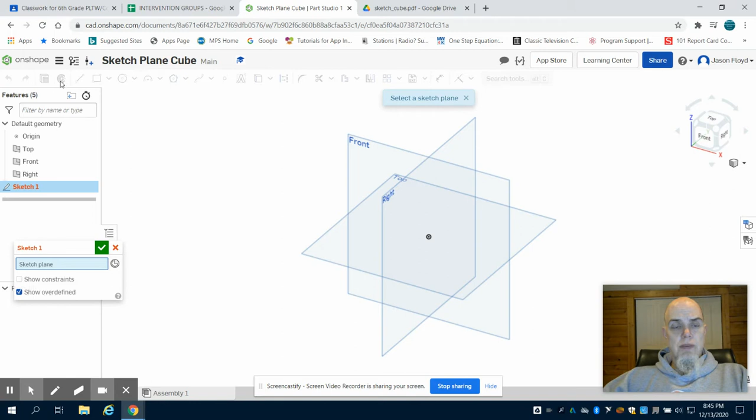The first thing I'm going to do is choose a sketch, and then I'm going to choose my top work plane. We can see that graph paper that's now laid on that work plane. I'm going to choose my top to orientate myself, and I'm going to start by simply drawing a 2-inch by 2-inch square.

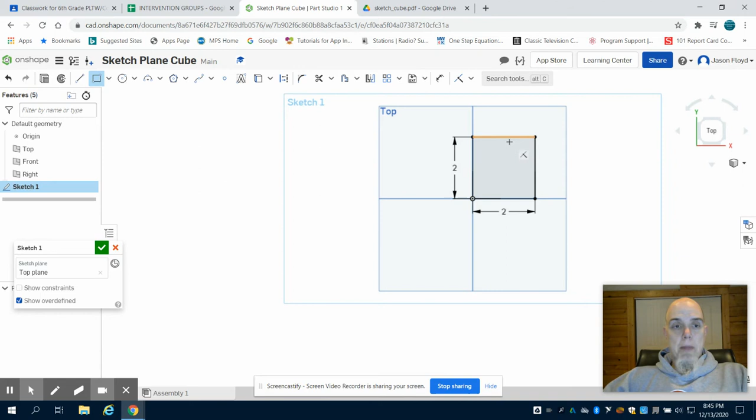From there, I'm going to extrude this square 2 inches as well. This gives me my 2-inch by 2-inch cube.

Now, going back to our orthographic drawing, the first thing that we're going to notice is we have a 1-inch hole on the top that is centered. We can see that it extrudes or cuts into the block 0.5 inches.

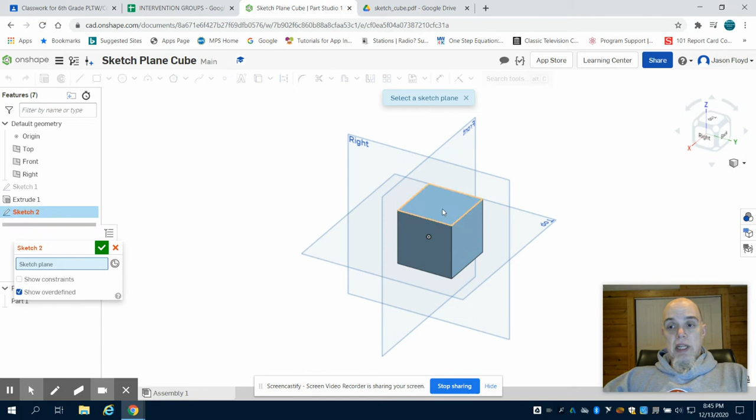So I'm going to choose a sketch, and I'm going to lay it on top of my cube. Orientating myself by clicking the navigation cube, I'm going to draw a 1-inch circle roughly in the middle. Now I can come to my dimension button, and I can dimension from the center point to the top line 1 inch. I can also dimension from the center point to the right line 1 inch. Now what I have is my circle that is centered.

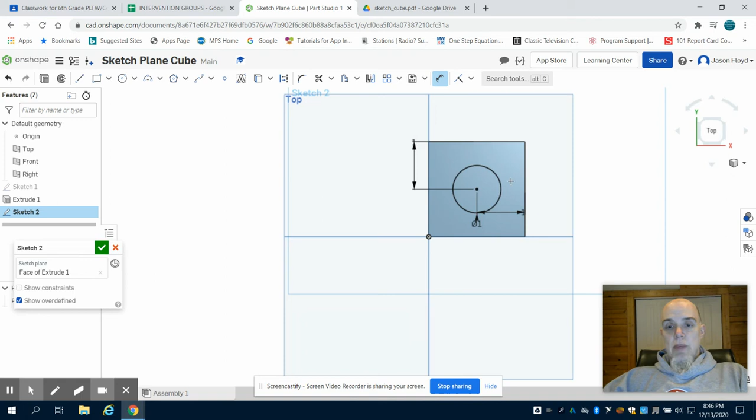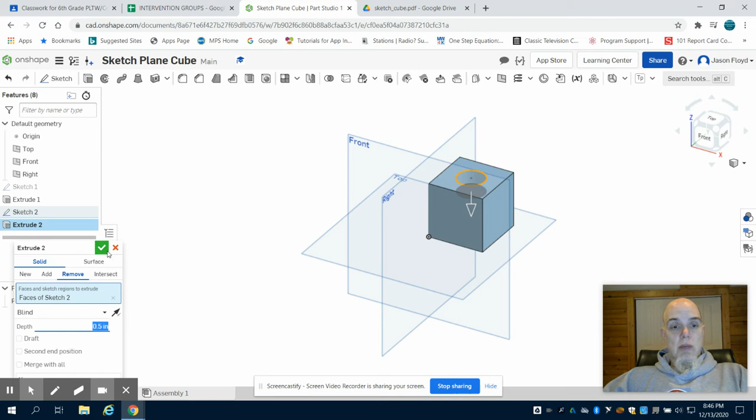I'm going to click on my extrude button, and instead of adding a feature, I want to remove. That's going to switch the direction of the extrusion and remove the material. I'm going to change it to 0.5 inches. Green check mark to finish. And we can see I now have that extrusion.

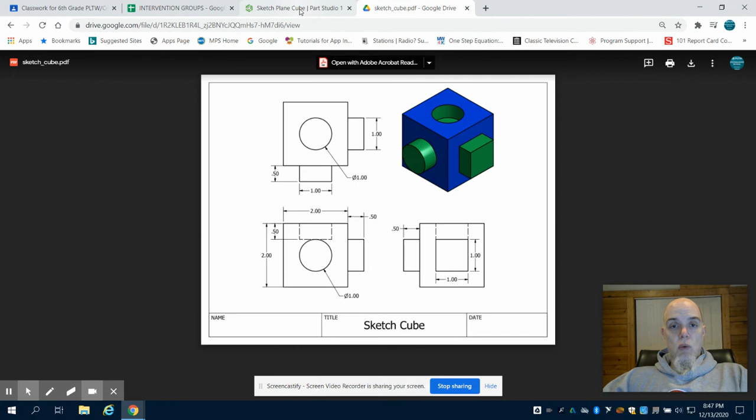Coming back to my orthographic drawing, I can see on the front, I have a circle 1 inch that's extruded outwards 1/2 inch. So I'm going to come back here, grab my sketch tool, choose that front face, laying that graph paper across the front of that cube now.

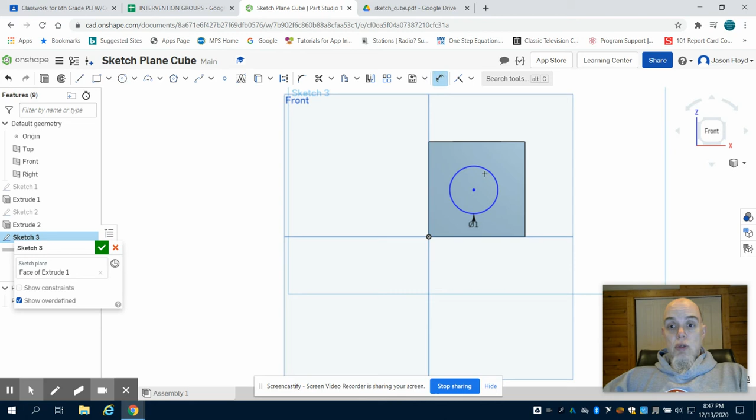I'm going to do that same process, grabbing my circle, making it 1 inch, coming up to my dimension tool, dimensioning from the center point of the circle to the top side, 1 inch, from the center point to the right side, 1 inch as well.

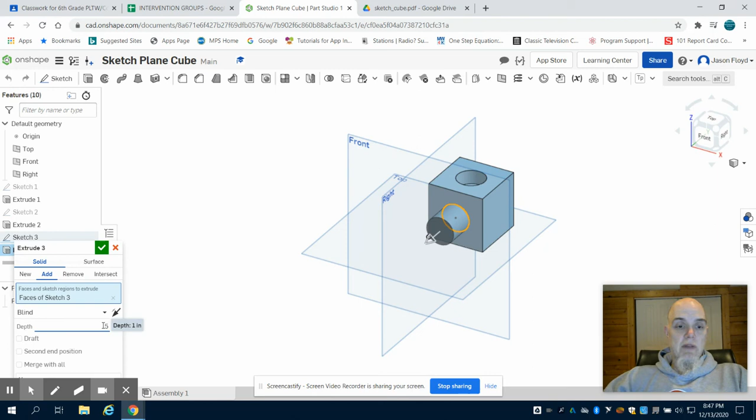But this time when I click on my extrude button, I'm not going to remove, I'm going to add, and I'm going to add 0.5 inches. So again, I'm going to green check mark that.

Now we'll notice on my orthographic drawing in the bottom right, on that right side, I have a 1 by 1 inch square that is centered. I'm going to grab my sketch. I'm going to choose that right side.

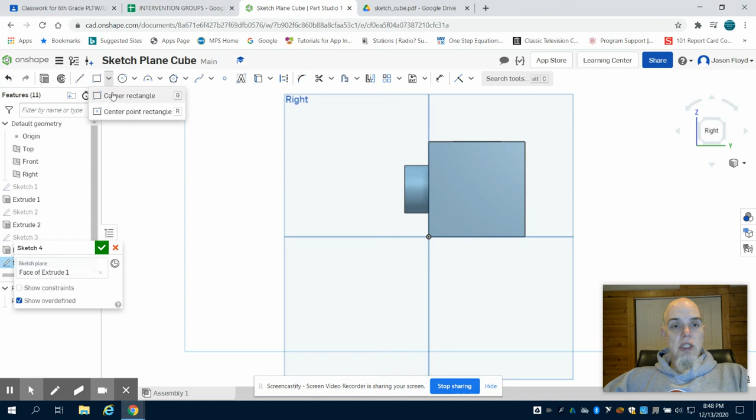Clicking on the right here, I'm going to change my rectangle tool instead of a corner rectangle to a center point rectangle. And I'm going to go roughly to the center and draw a 1 inch by 1 inch rectangle.

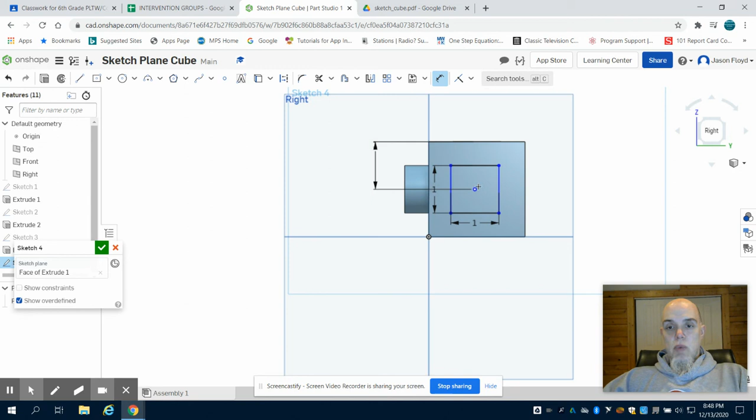I'm going to come up to my dimension tool, the center point of this rectangle to the top line, 1 inch, center point of this rectangle to the right line, 1 inch, and we can now see I have that centered rectangle. I'm going to click on my extrude button.

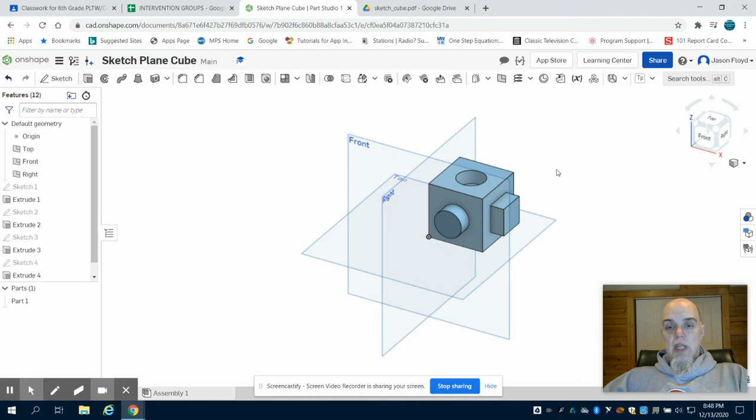I'm going to extrude this again by adding 0.5 inches. And what we can now see is I've replicated that sketch plane cube according to my orthographic drawings, so it looks identical now to the isometric.